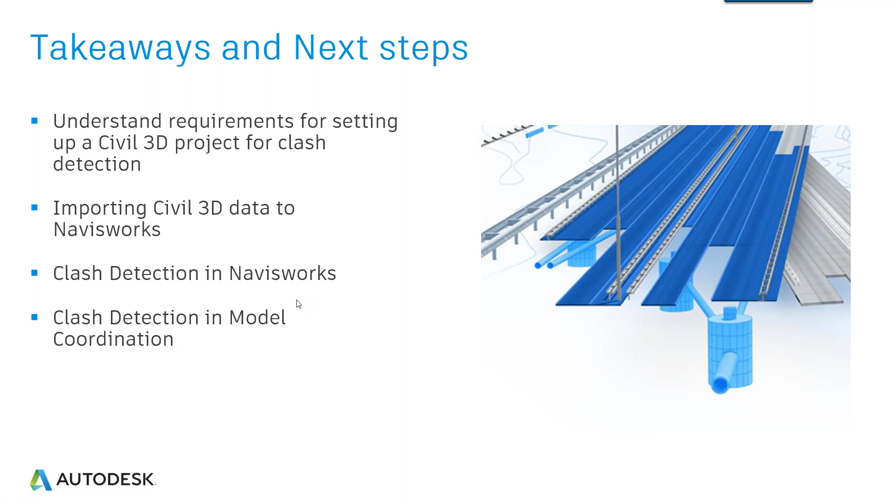Okay, so let's talk about what we're going to do, and you saw that this is not death by PowerPoint. Nope, not today. We're going to jump right into the product. So I know that everybody just can't get enough of these wonderful PowerPoint presentations, but just bear with me and we'll start playing around in the product here real soon.

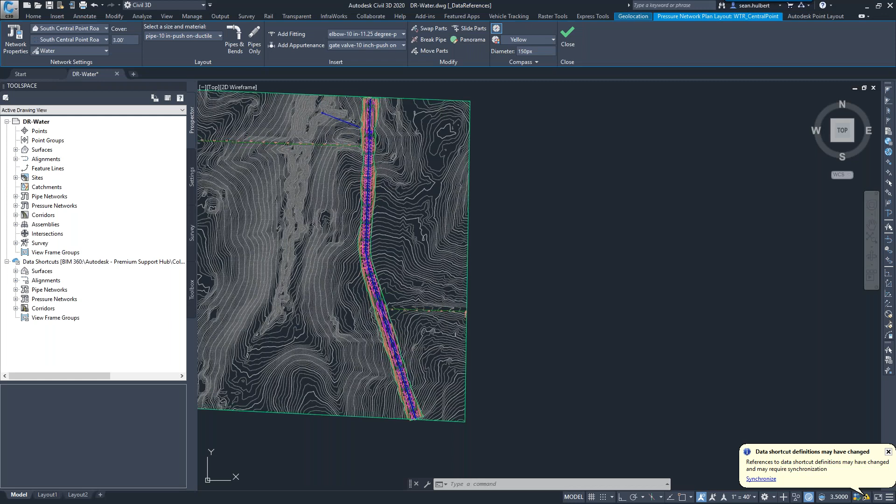So what does it look like to set up your files for clash detection? So what I'm going to do here is I'm going to go ahead and open up my Civil 3D drawing, and I'm going to shut everything down. I don't think I ran my rules on this pipe. This should be interesting. We'll see what happens.

Just to give you a little background of what I've done here, I kind of like to start with a blank slate. No tricks up my sleeve, not hiding anything from you. I just want you to know that what I've done here is I went out to InfraWorks, and this is one of the workflows that I love about InfraWorks. Just a little bit of one of my side tangents here that if you've attended my presentations, you know I take many of those tangents from time to time.

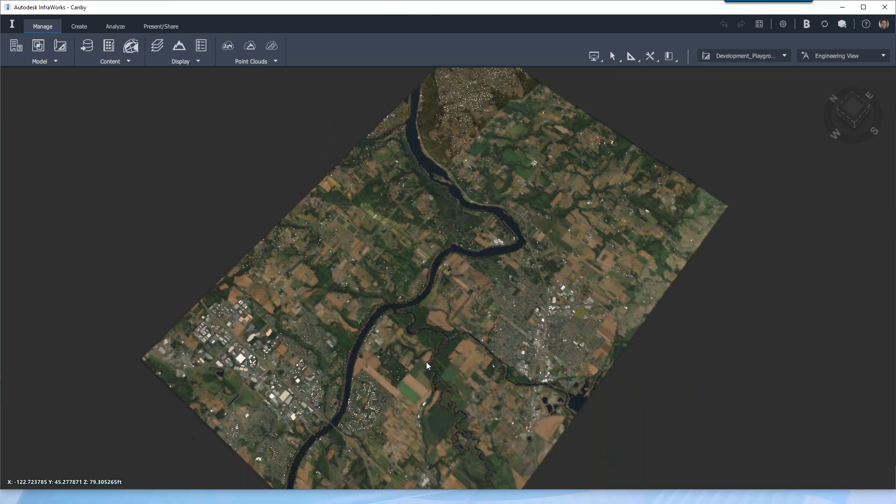But what you're going to see here is I've just jumped into InfraWorks. I'm going to say that 3 or 4 times today. I've jumped over here into a model in InfraWorks, and I just picked a nice flat area that I wanted to start doing my work in. So I needed a surface. I wanted some alignments. I wasn't going to create all this from scratch. Real quick and easy, I just grabbed myself a data set right here in my InfraWorks model, sent that over to Civil 3D, and started doing my work.

So I kind of like to just bring everything together and tie my story around, because one of the comments that I get from a lot of our customers is, why do we have to keep learning all these different tools? And the very first thing I'll say is, have you ever been on a construction site and looked at the tool belt that the people are carrying around? There's no less than 30 tools in there, I would guess, on any good day, anything from a pair of pliers, a measuring tape, a level, hammer, screwdriver, you name it. So think of your software the same way.

We don't have any trouble jumping out of PowerPoint, jumping into Excel, jumping into Word to get our word processing, our presentations, and our spreadsheets done, but we get a lot of reluctance to jump out of Civil 3D and jump into Navisworks to do some clash detection. And I just want to start understanding that apprehension a little bit better, but I also want to start helping our customers understand that we want you to use the right tool for the job.

There is not one piece of software made on the planet that will do everything that you want it to do. It doesn't matter who makes it, that software does not exist, because what you want your software to do is a little bit different than what I want my software to do. So we're trying to make everybody happy. And so that's why we really do have to creep out of our comfort zone sometimes and leverage the tools that we have available instead of just what we were told that we needed to be using. So with that little spiel, let's go ahead and jump over to Civil 3D.

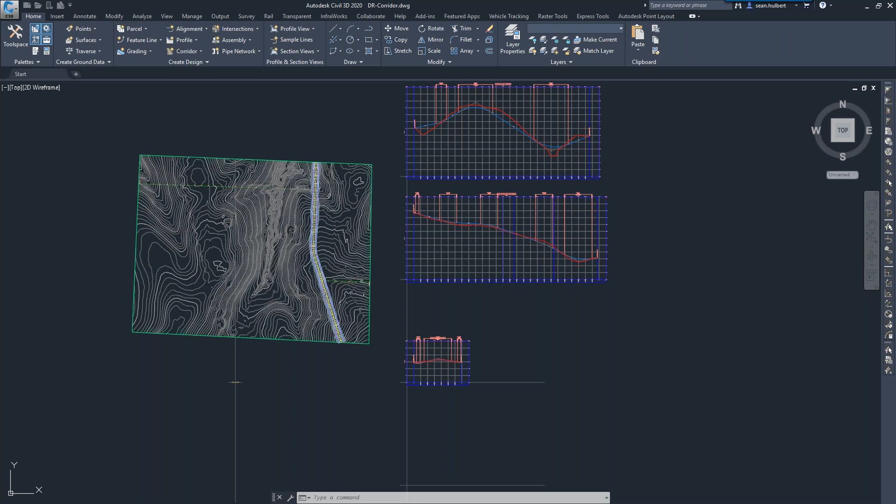So we're going to just jump into this corridor drawing that I created here. What I've done is I've separated all of my files in a traditional style environment. I do understand that you can push everything in the same file inside Civil 3D if you would like to. I recommend against that, because if you do get corruption, you've corrupted everything and you've lost everything.

But in the model coordination environment, you're really going to need to keep these objects separated from each other, because it's not going to want to clash on the information that's in the same file. It seems more user-friendly to keep things separated, and it seems like a more realistic environment, and that's what we're trying to go for here. Try to stay as close to reality as we can.

So what I've got here is just a quick corridor drawing. You'll see that I've created my data shortcuts over here in BIM 360, so I can leverage all that information. And because I knew you were going to see this, I wanted to let you know that that surface came from the InfraWorks model that I created.

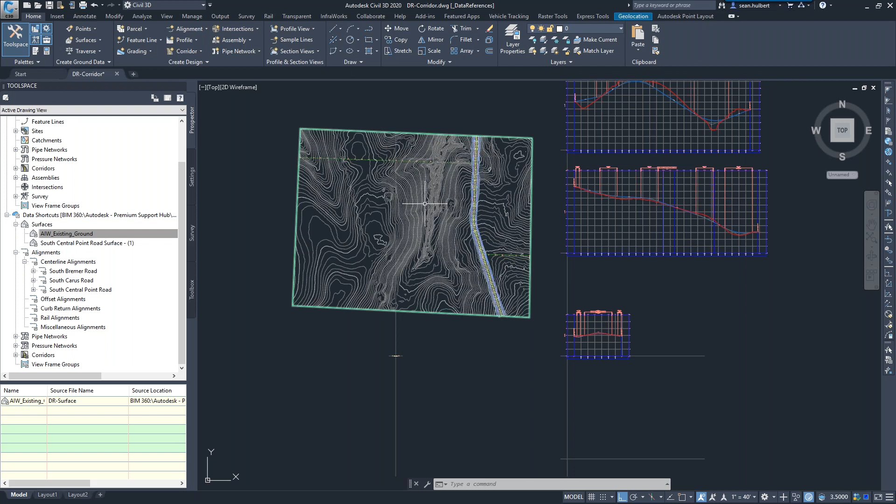Now, a couple quick things. This is just the component road that came from InfraWorks. I went ahead and updated some of the information that came out of InfraWorks. Actually, I wanted to make the road wider so I could get all my pipes in it. Kind of the advantage of creating stuff on the fly in a pretend world instead of the real world. I can just make the road wider, where not everybody on the call has that availability.

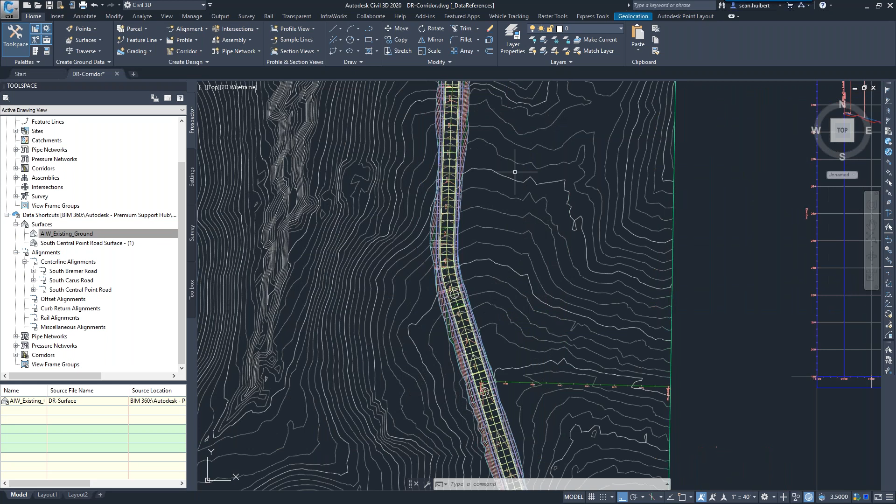And so what we've done here is we've created our corridor. And inside this corridor, one of the things that we're going to want to do is extract our solids. And the reason is if you think about the way that a corridor is constructed, corridor is based on the,

pardon me, here we go, a little bit of a tickle. No virus, I promise.

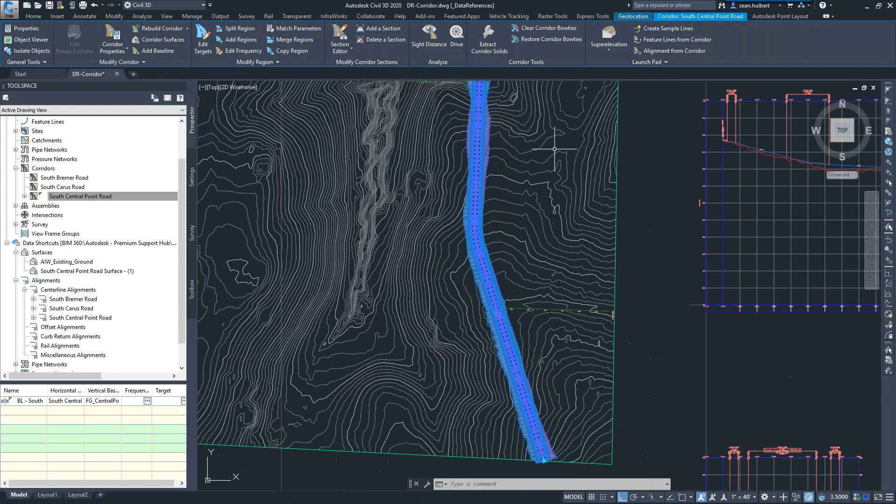So if we think about the way that corridor is constructed, we're basically creating that corridor based on the frequency inside the corridor properties. And so if we were to run a clash detection in something like Navis or in our model coordination tools, we're not going to have a complete object in every scenario, right? We're only getting those cross-sectional samplings. So one of the first things we want to do with our corridor is extract our solids.

And this tool's been around for probably a good 10 years now, maybe not quite that long, but it's been out there for some time. And what you're going to see here is, I've lost my dialog box. Let me try that one more time.

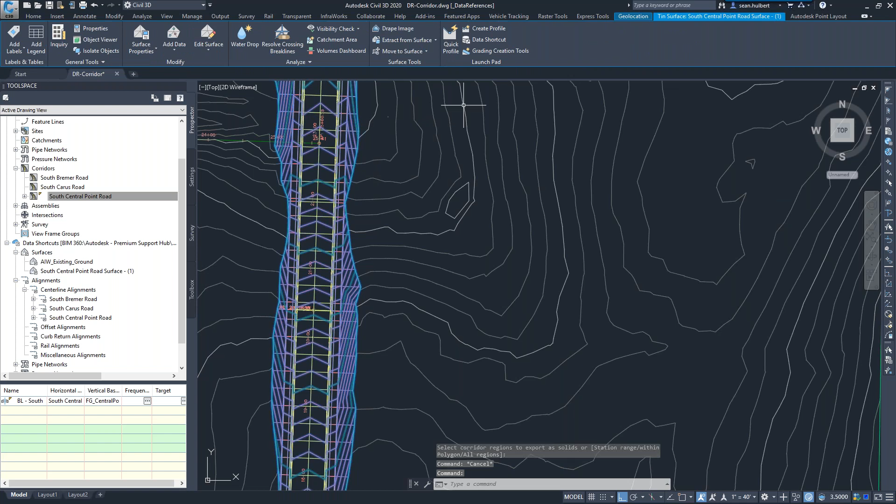That's my surface, not my corridor. And you'll see that I've already got my solids in here, just so you don't have to wait for me to do that. But what I was trying to do is show you the process to get those to extract. So we'll extract our solids. Down here at the bottom, it's asking, where do we want to extract these solids? Is it just within a specific area, or do we want to do all of it? There, I was not reading my command prompt. The very first thing we all learned in AutoCAD is to read that command prompt.

And now we're going to talk about preparing the information that we want to send out for clash. So you'll see in this assembly, we've got our lane, we've got our curb and gutter, we've got our sidewalk, we've got our daylights, and then we've got the other lane on the other side of the road. And here again is a great example of me not following my own CAD guidelines and using good naming conventions, because if I'm not paying attention, I'm not really sure where this object is at. And if this was a much more complicated subassembly, it could be even more challenging for me.

So just back on some of the things that you'll hear me harp about in all of our presentations is good naming conventions. And then all of the things that I harp about, you'll see that I'm very much a hypocrite about my own hypocrisy.

So let's continue here. We've selected all the objects that we want to extract. Some of these elements might not be useful, or do we really need to extract the daylight? And one of the things we'll talk about is when we're working with surfaces in Civil 3D, while they're extremely powerful, they're extremely ignorant, in my opinion, because they have no idea about the material that makes up that surface. They're just that collection of lines that are creating this object for us.

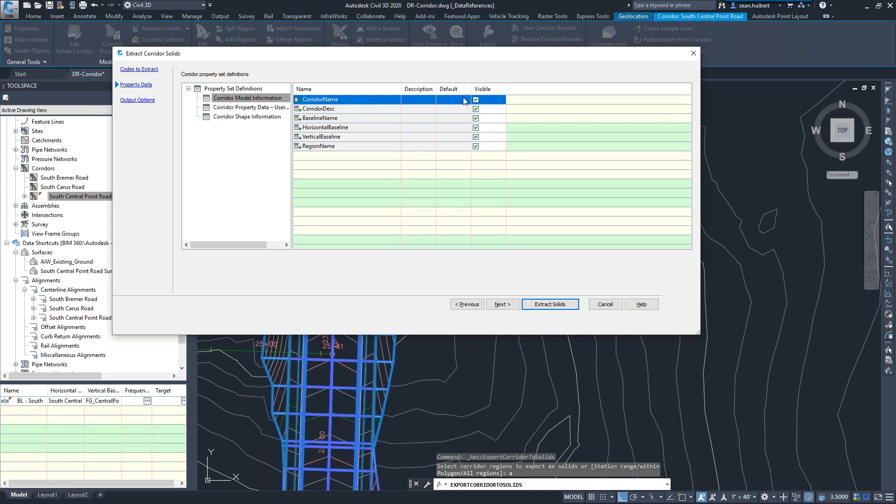So, it's definitely there. It's a tool that we can use, but you may consider not including it when you're doing your extractions. So let's go ahead and we'll pull off Daylight General on both sides. And that way we won't have to worry about anything that gets in our way. And then we'll say next. Now we've got some other settings that we can control in here. A lot of extra information. We don't need to go into all of this. Go to our output settings.

This is where I want to point out that we want to base on swept solids. We want that solid object between those frequencies. That way, we'll see a much better object in order to do our clashing. I'm actually going to send this into a new drawing, which will break our dynamic link. But since I've already got them in this drawing, I didn't want to send them back into here. So we'll go to our BIM 360 environment. We'll get into our collaboration for Civil 3D project. And these are going to actually be something that we're going to use for coordination.

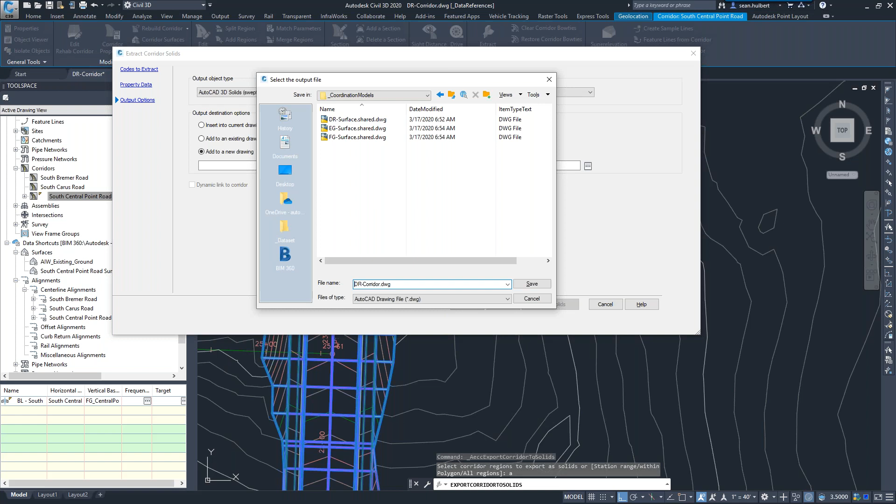So we'll just call them solids. And there we go. Extract our solids. It'll go ahead and create that drawing for us, and then we'll be able to leverage that information inside our Navisworks models. So this should be all fairly review for everybody.

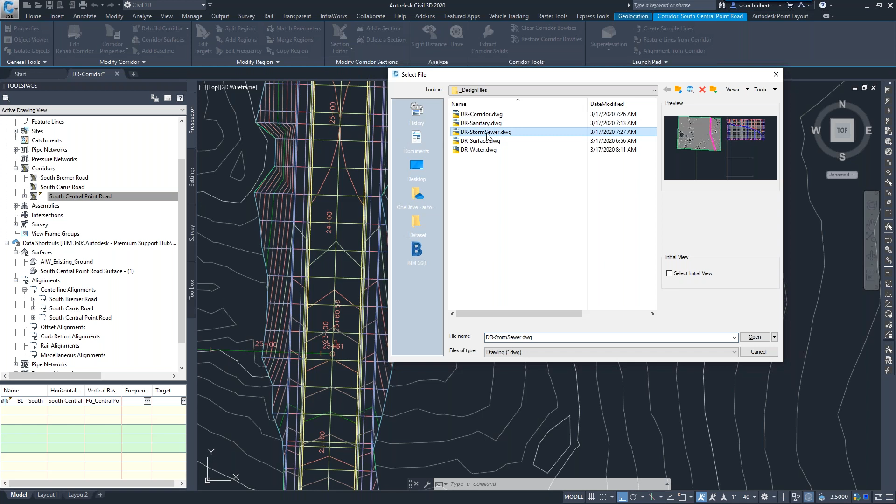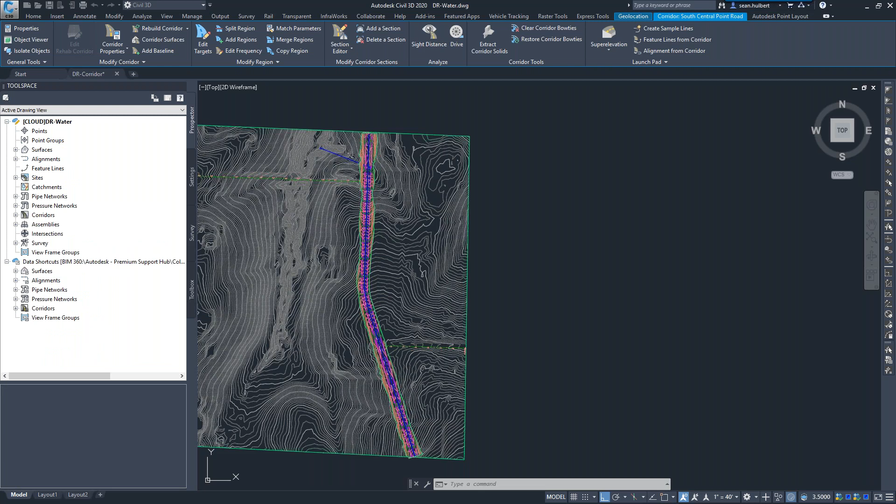Let's go ahead and open up this water drawing real quick. I just want to make sure that the changes I made to my drawing did get saved before I go and embarrass myself. You'll see that I have collaborated. I have referenced all of my different objects into my different drawings, and that's going to give me the ability to work as we normally would in our industry. We're going to be able to see that we've got our sanitary, we've got our storm, and we've got our water here. And I'm going to go ahead and select that water.

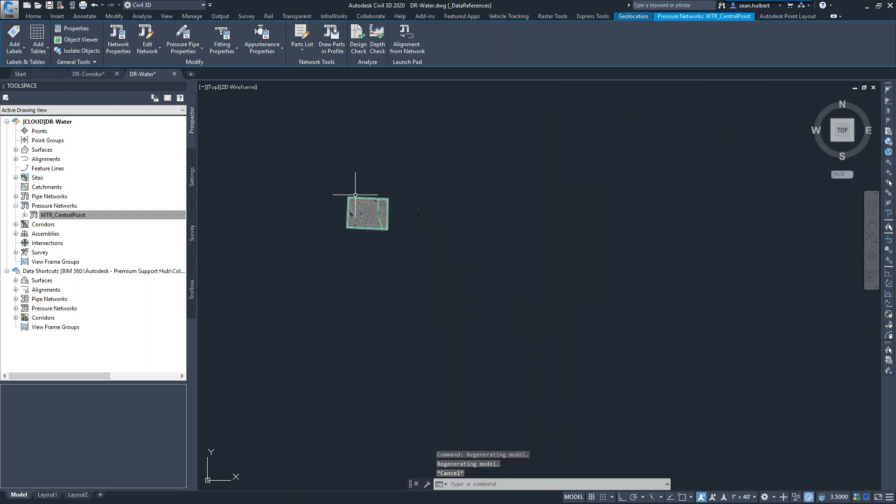And I'm going to draw this in profile. That's what I did not do. I did not set the vertical on this. My apologies. Give me just 30 seconds here. Surface profile off of both of those. Oops, and that was the wrong street.

Again, Sean's not paying attention, reading his prompts. We've all been talked to about that before, I'm sure.

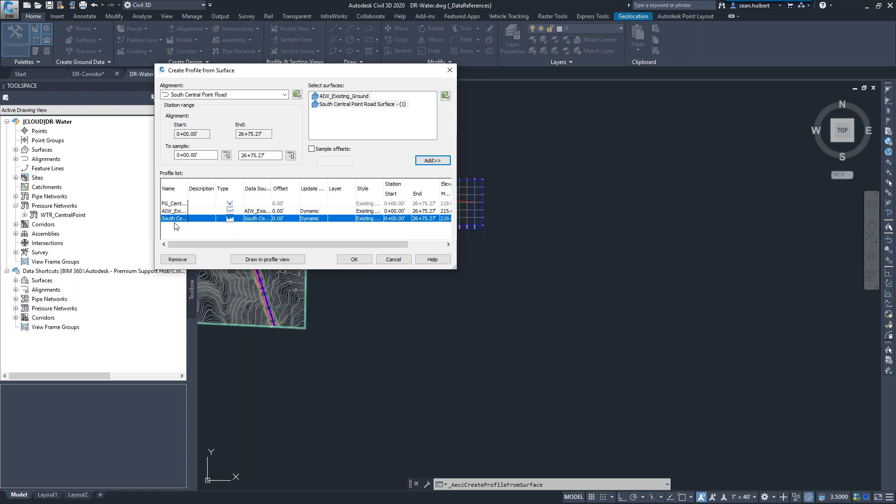Getting in a little bit of a hurry. My apologies. There we go. We'll get rid of that. So we've got that. There we go. Create our profile view. We're going to get rid of this one. We don't need that road. I didn't set my design profile correctly. Let's go ahead and correct that real quick.

Things are running just a hair bit slow for me right now because I'm trying to be in a hurry. That's the way it always works, right?

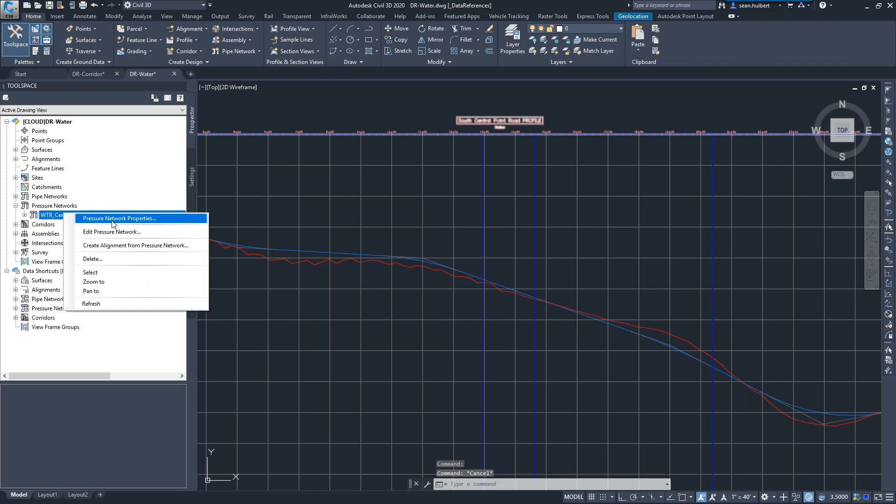There we go. And now I'm going to go ahead and draw my pipe in my profile. I knew I'd forgotten to do that. My apologies, like I say. Yeah, let's just go ahead and drag this guy up. It is vertical. We're not too far off. Yeah, we are. You can see us coming out of the ground right here. So that's actually not going to work for us.

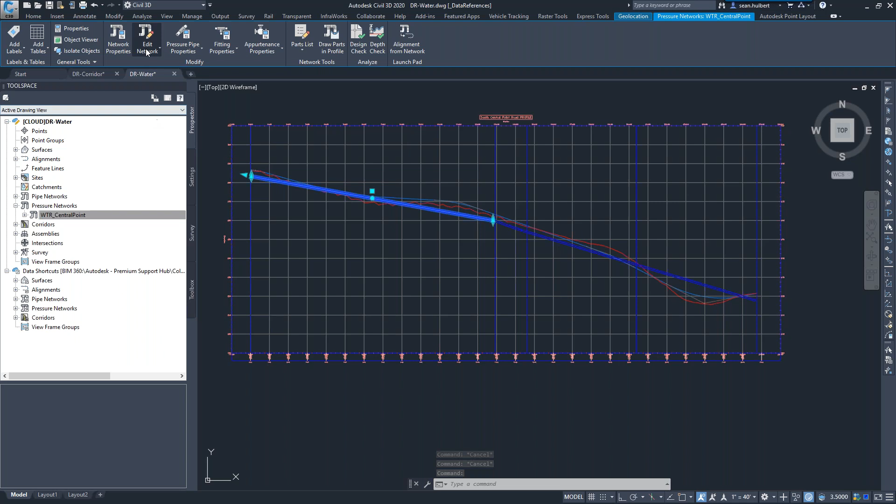And let's make sure that it's going to hit something. So I'm going to put that at about 4 feet. I'm pretty sure that's going to hit. Oh, should have grabbed the whole pipe. Sorry. There we go. Okay, we'll leave that one where it's at. Everything is underground now. Let's go ahead and save our drawings.

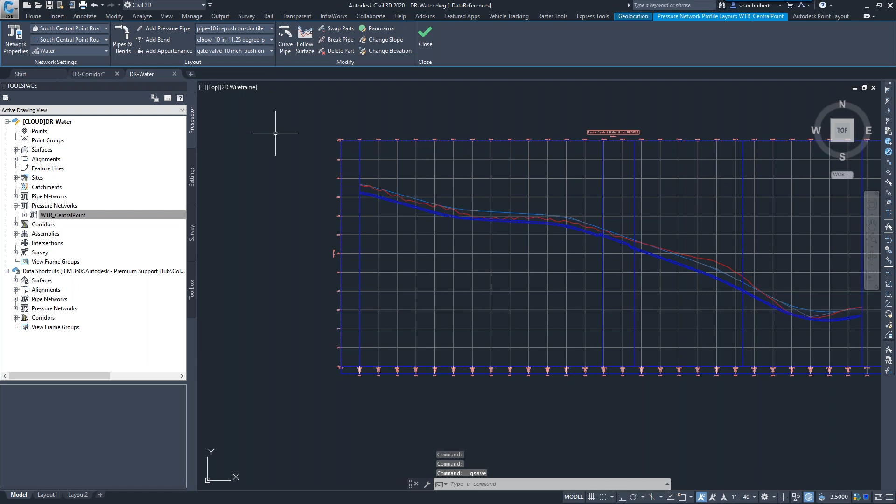Let's talk about getting this information moved over to Navisworks. So again, you heard me talk about how surfaces behave. Let's go ahead and start a new Navisworks file here. Okie doke. So we're going to go ahead and append it. And because I don't actually have the model stored out here in BIM 360, we're just going to go ahead and append a local model right at this time.

And what we're going to start with here is my corridor, because I know I have the solids in that corridor previously. And I'm going to go ahead and add sanitary, storm and water. I'm going to leave my surface out because, like I said, I don't really need to clash with my surface. And so the first thing you're going to see me do here as I start preparing my drawings is start hiding all those surfaces that are in my way, and then we'll start running some clash detections.

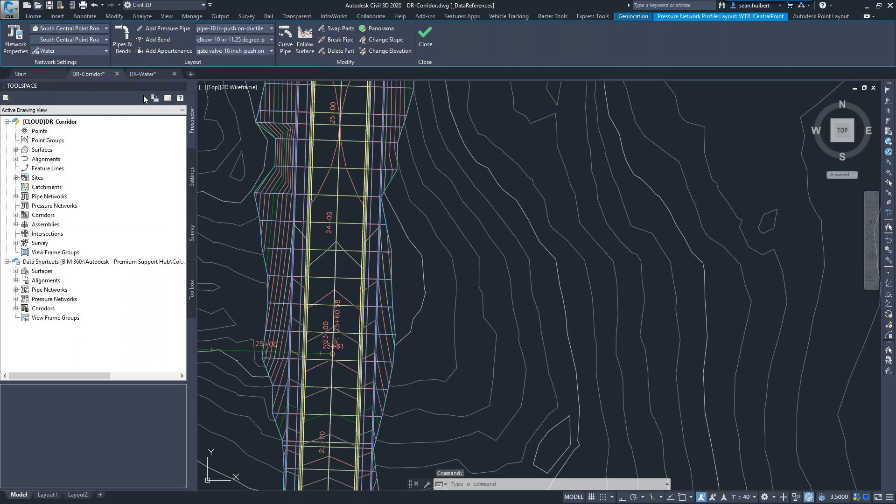Now, while this is happening in the background here, I'm going to jump back over to Civil 3D just to give you a more complete look at what we were working on here. Oops. Sure, so let's go ahead and I'll open my storm file here as well. And you can see that we've got our pipe network designed. So we're messing with a corridor today. We're going to play with some pressure pipes, and we're going to play with our gravity pipes.

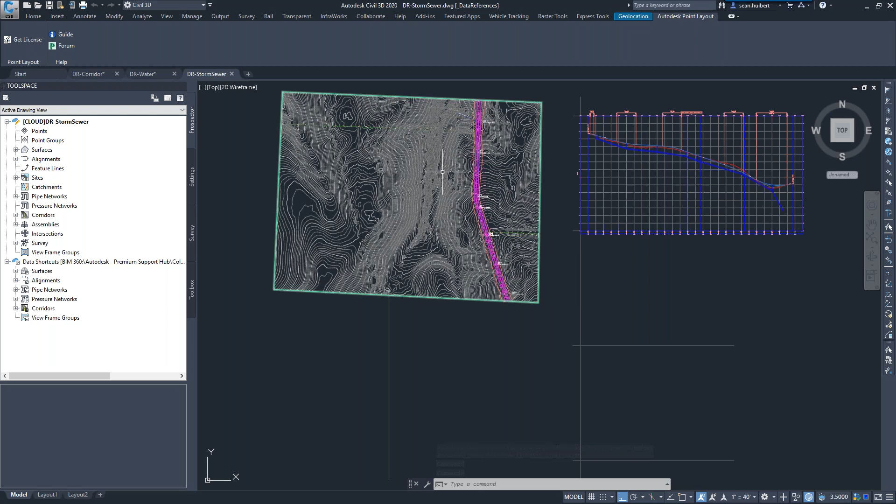So it's pretty much everything that you're going to need in any Civil 3D project as far as what we want to start clashing inside Navisworks, or finding those potential conflicts. So here you can see our storm line. I haven't brought my water or my sanitary over. Not important, but it is important to understand that this information will come through in unintended areas. So we just have to be mindful of it. So we've pretty much prepared our drawings the way we'd like to see them.

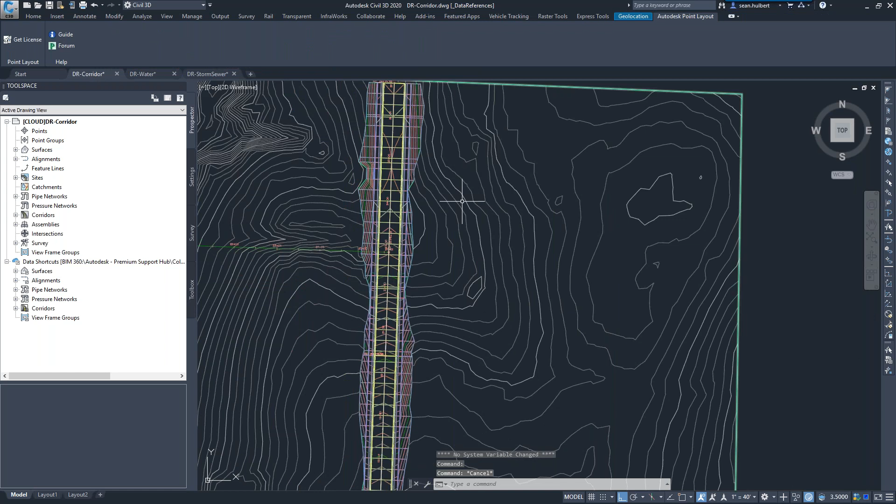We were killing a little time waiting for Navis to do its thing. Didn't kill quite enough time.

So let me just throw out a quick question there for everybody, and you can just throw your answer up in the Q&A. Is it safe to assume that pretty much everybody is working from home at this point?

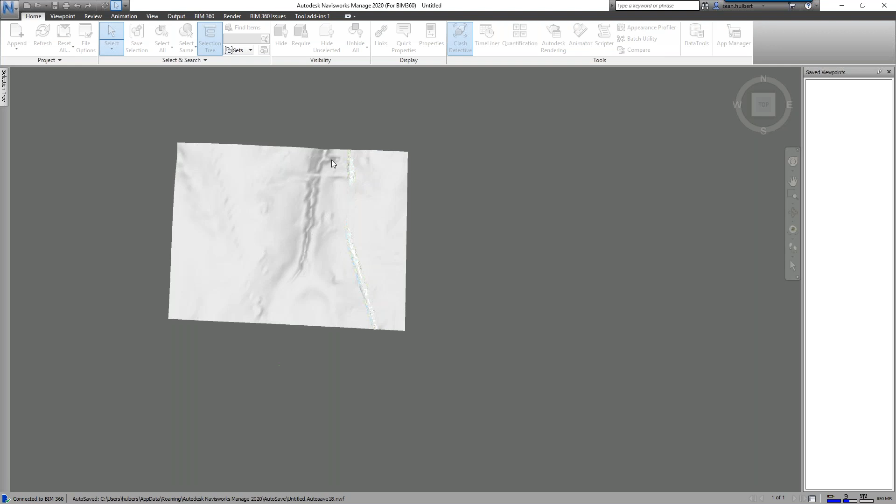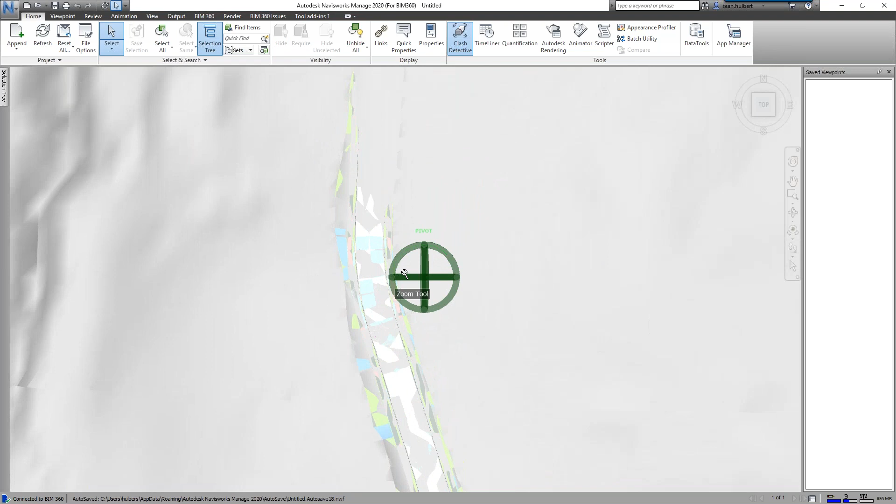Wow, that's a long break. Well, they're doing virtual online. My concern is, is she going to get her room and board back? Because that's not cheap at college. Right. And do I get that money?

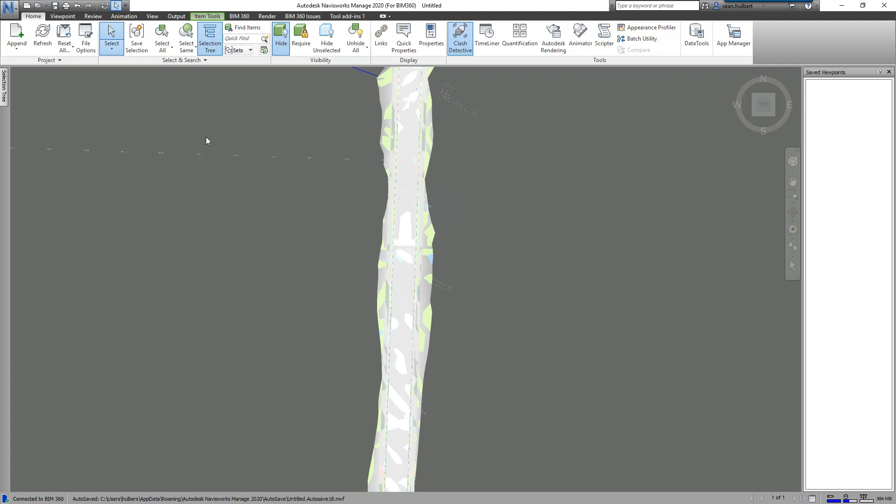Okay, so what you're seeing me do here is I've brought in my drawings, and you're going to say, yeah, but you didn't bring the surfaces in. Well, remember that I have those surfaces data referenced into my Civil 3D files, so I'm seeing them again here. And that's something you definitely want to be paying attention to, because when you start doing your clashing, you want to make sure that you're clashing the information in the file that you intend to be clashing it in, and not in some other file just because it loaded mistakenly.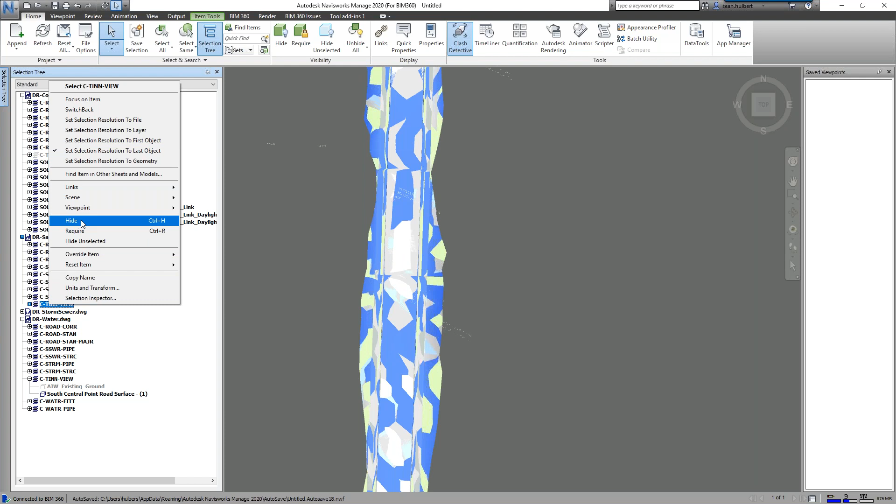I'm also going to go ahead and hide the TIN for my road, because I know that when I built my model, I had set all of my information to that surface. So I know that it's going to be pulling all of my vertical data off of the surface. I don't have to worry about it here in Navis. I'm not going to do those clashes inside my model.

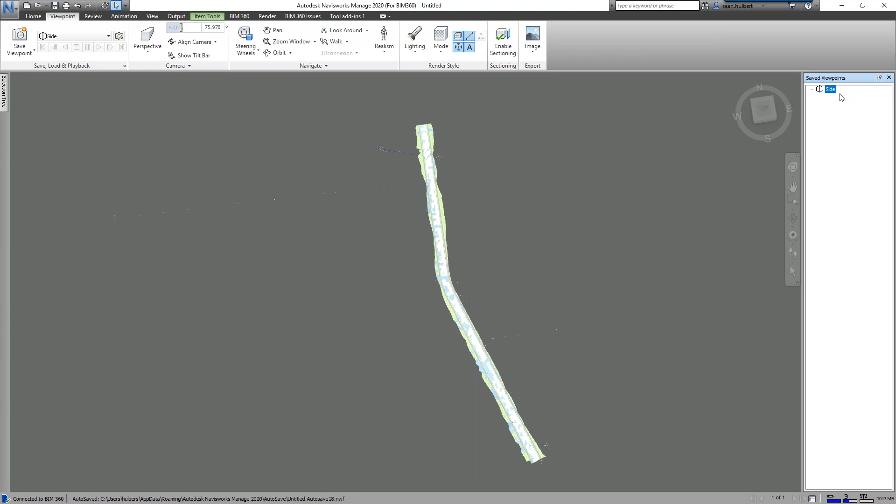But as you can see here, now let me just take two steps back. One of the very first things I like to do is save a viewpoint. Because if you're working in real world coordinates in Navis, sometimes it can be, oh, that's not site, that's side. Talking and typing at the same time is never a skill of mine.

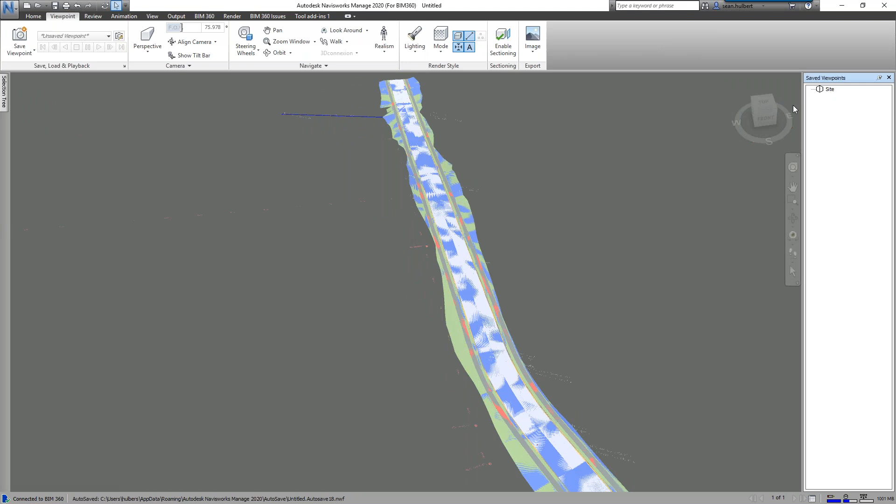When you're working in Navis, from time to time in real world coordinates, you can have things happen where you lose your model. And all I did was do a little zooming, and now you can see that I'm pretty much lost in space. Can't find myself. Oh, it did pop back up. But as I'm zooming around, it's just not happy. I always like to save my site, and that way I can get back to where I'm at. Also, when you're doing your clash detections, this is going to help you move around your model as well. And I also like to turn off ortho.

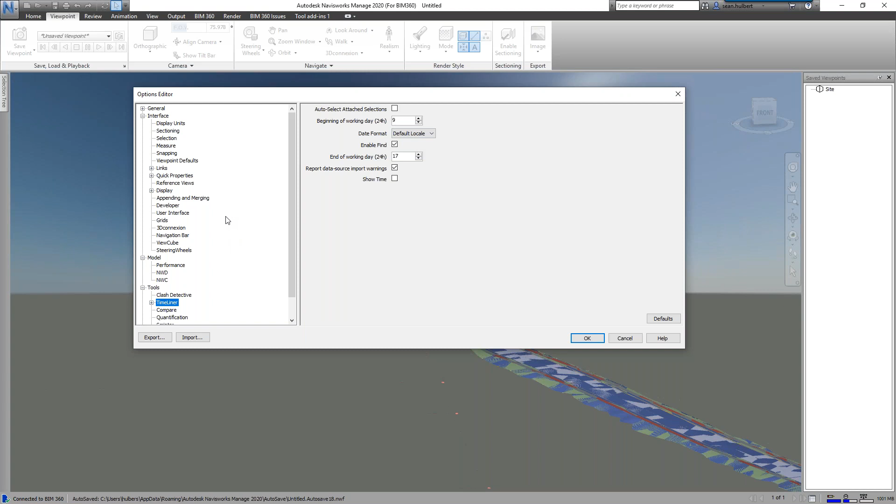Now, one of the things that I failed to do is go into my options and talk to you about some options. Do make sure that you set up your units correctly when you're jumping over to Navis. And if you want to limit any of your coordinate accuracy, you can do that as well. We don't need anything more than a thousandth in Navisworks when we're doing clash detection. There's really no reason to go any further than that. Go back to perspective. There we go. Oop, and see, you saw me lose it again.

Okay. So as you can see here, we've got our objects brought over. We've got some text and things as well. We can tell that not to come over if we don't want it to. Again, that's underneath in our options here. We have a lot of control, not full control, but a lot of control over what elements are being brought over from your DWG or DXF files. You can see I turned views, points, and lines off. I didn't really feel that we needed those because the lines aren't necessarily going to be clashing because they're not in 3D, or the ones that I'm using.

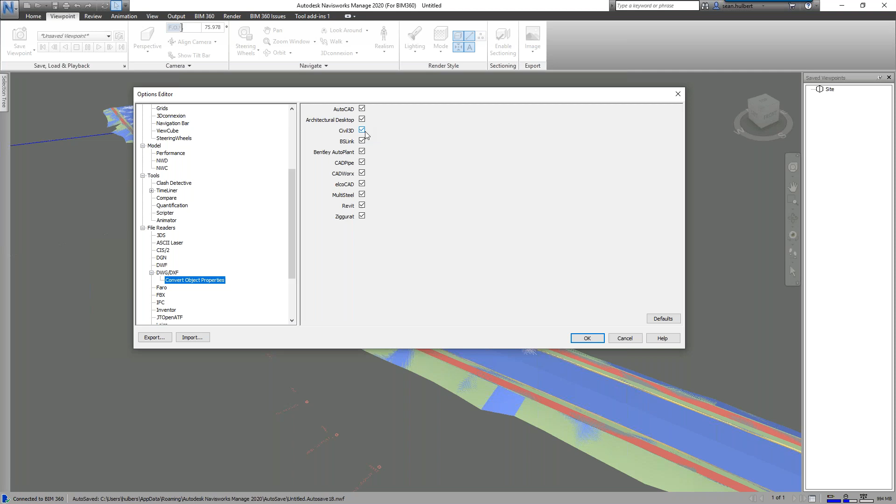The other thing is that right here, this has become a challenge for some users from time to time, because this dialog box will get unchecked for some reason, and the objects that you're trying to clash in Civil 3D are not coming over. Your pipes and your other elements are not coming through. This is likely the reason that that's not happening.

Okay, so without further ado, we'll go over here to Home. I've got my Clash Detective panel open. I'm going to go ahead and just drop it here right on top, and you can see that I can dock this using my docking tools here. Typical Navisworks functionality. That wasn't going to come out very clean, was it?

So the very first thing we're going to want to do is we have to add a test. Now, what do we want to test on? We have a lot of information that we can go in here. Let's go storm and sanitary. I can spell.

And now what I want to do is come over here to my sanitary drawing, and I want to choose my storm drawing. But do I want to choose the whole thing? No, I don't, because we know that there could be some corridor elements still in there since we have that corridor data referenced.

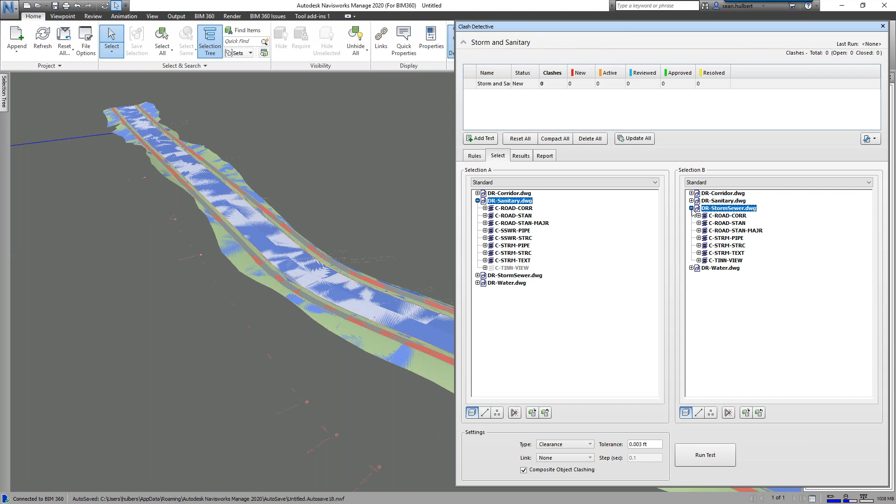So again, the best thing for us to do initially is clean a lot of this information up using our hide functionality. I'm going to go ahead and hide my corridor here. The reason I'm hiding my corridor is, you see, I've got my solids. I'm not going to clash on my corridor, I'm going to clash on these solids that we extracted.

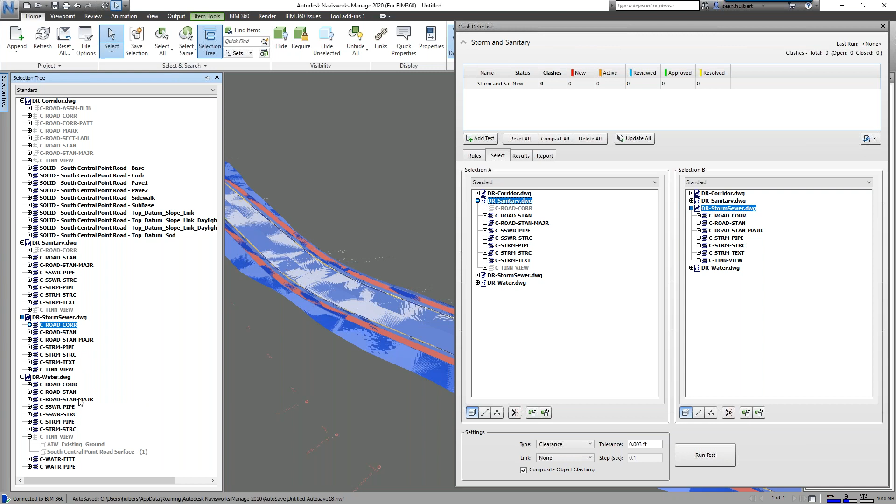In our presentation portion, or the Civil 3D portion, you saw me actually create a separate file with those elements. I can bring that in and we can clash on those. For right now, we're going to go ahead and do this because I know this one is functioning the way it should. You know me, I'll get a little bit renegade, and then things won't function the way they should.

So let's go ahead. We've got our clearances set up. Do we want a hard clearance? Do we want to be a conservative hard, which gives us a little bit of a buffer there? So we have our determinations.

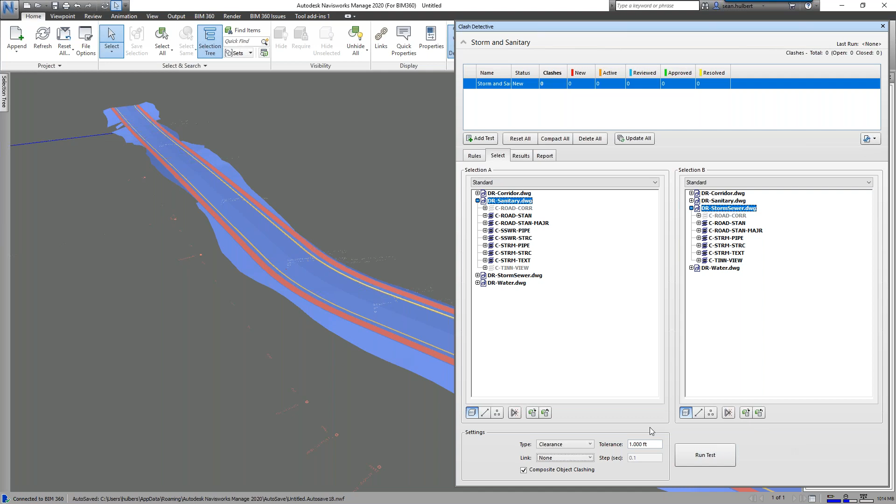And then where do we want to link this back to? We're not going to link this to our timeliner, we're not worried about that. And let's go for clearance. Since we're doing sanitary and storm, we're going to need a good foot of tolerance through these things. So let's go ahead and run our test and find out which clashes we get.

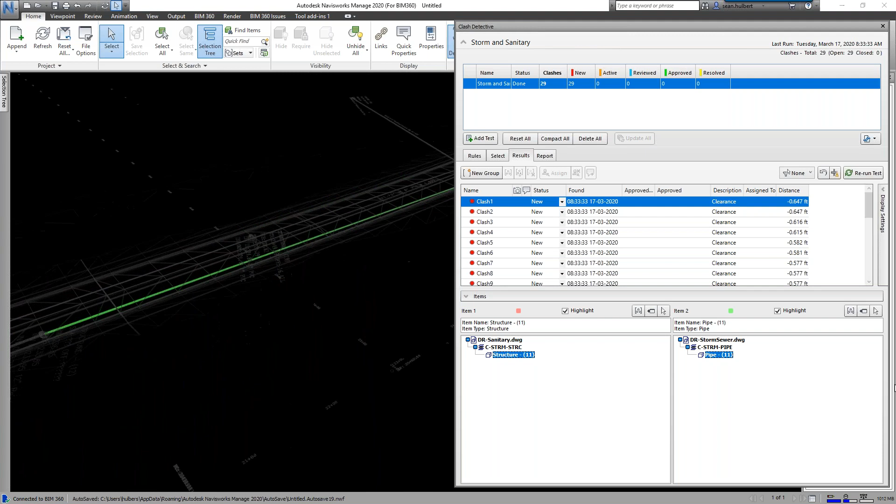Here we go. Now, Sean has made a mistake. Obviously, structures are going to clash with pipes if they're connected to the same thing. This one is not necessarily showing us a clash that we should be worried about. This is clashing a pipe with a structure, and the storm structure is coming from the sanitary drawing because it was data referenced in.

So again, this is just part of prepping your file for use. I failed to do this when I was doing my updates. Another way to do this would be to have files that we pull outside of our design to do our clashing. But then think about the extra step that's required there. So there's not a perfect scenario for anything in any software, but there are a lot of great recommendations that will follow.

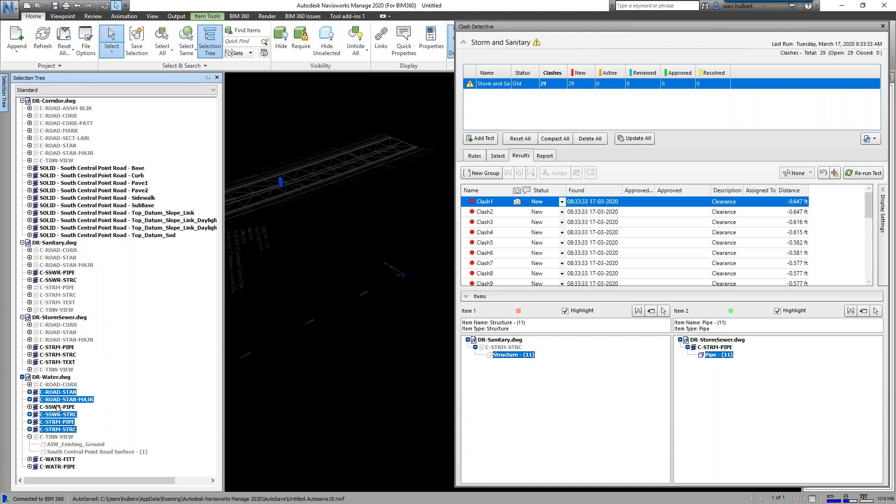So what you're seeing here is I've turned my storm off in my sanitary. I'm going to come up here and turn all my road stuff off as well. I'm going to turn sanitary and storm off in my water. We don't need to see our text.

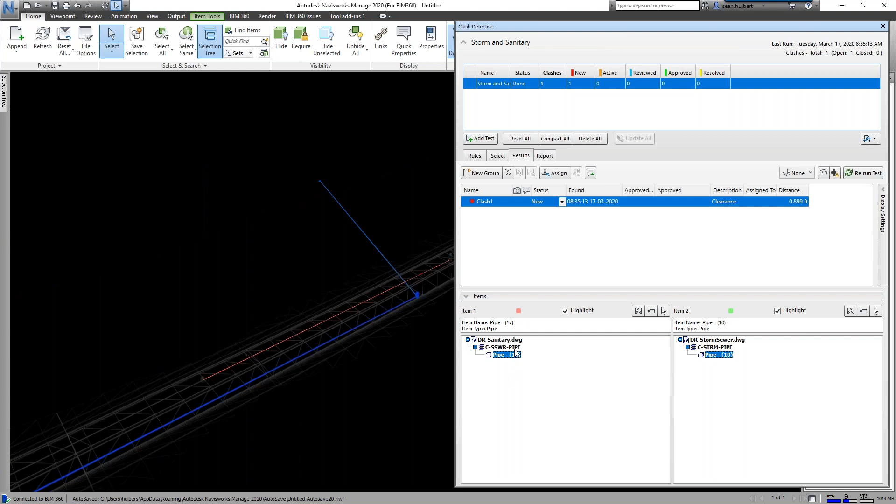Now what we should see is we have different clashes. We actually, right here, and this is kind of what we were hoping to see, is we have our storm a little too close to our sanitary. And there's a lot of time spent and wasted in civil design doing these exact activities.

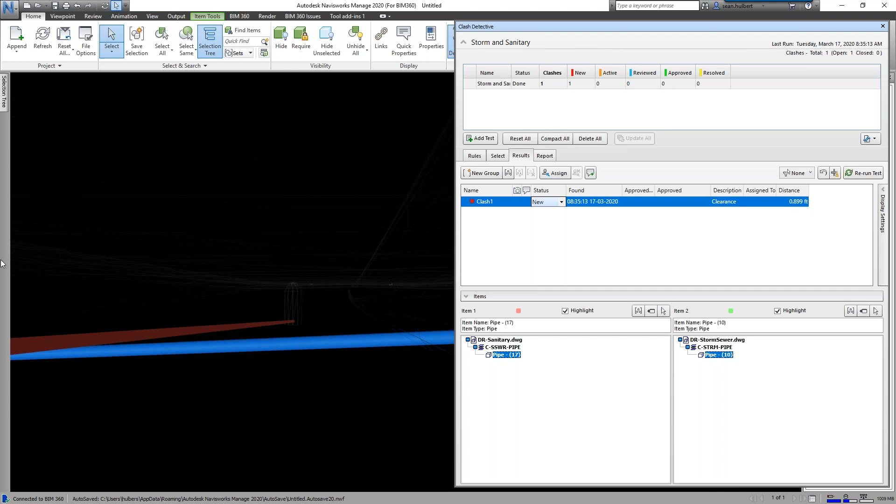You can see I don't have my catch basins attached to my storm system yet, but as those catch basins are added to my system, you're going to see more problems start arising. Right here, we have a distance issue. We don't have the clearance that we're looking for. We're pretty close, but we don't have that clearance.

And so now we can start creating our reports. We can extract that information. We can assign these issues or situations to specific users to have those issues corrected. We can group these issues with other issues related to similar problems, or we can create another test. Let's go ahead and run water.

Now, we could select our elements like this and not have to hide the elements. So again, just like most processes inside any Autodesk products, there's more than one way to do the same thing. We just ran a test and we have no clashes with our water. Let's look at what that test is all about.

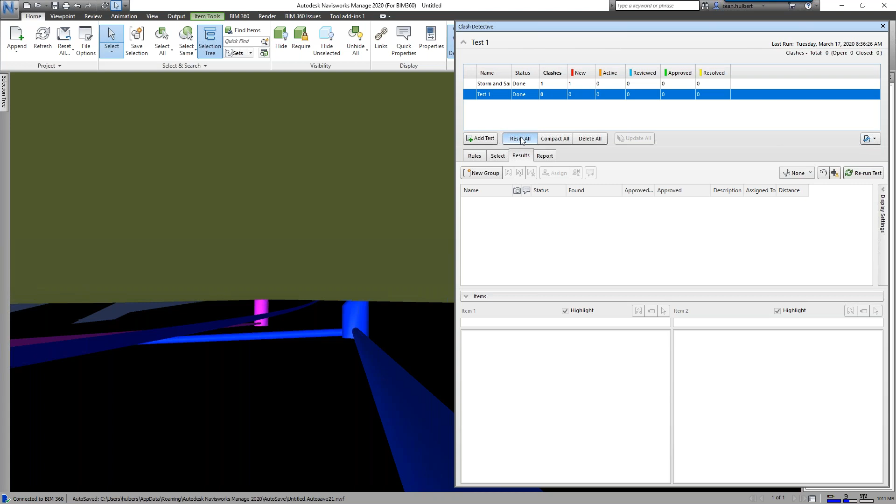Let me get rid of this one. Let's add a new test for water pipes and fittings. They should be hitting something - let me go ahead and do that to storm. I'm pretty sure they hit storm. We want a clearance of 1 foot. They didn't hit, they didn't hit, they didn't hit. So what we can see here is we've got our water line right here under the road.

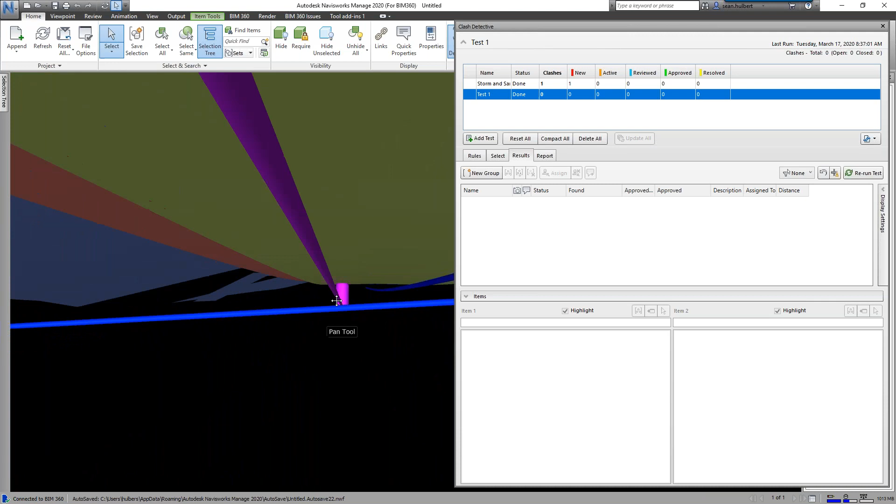It looks like it's pretty much got clearance everywhere that it needs clearance. Again, if I had my catch basins in there, you'd probably see them crunching into each other. But let's talk about our corridor now - let's see what information we can get out of that corridor.

This is where I think a lot of power is, because we can actually do these clash detections on each of the individual elements of the assembly that's built inside our corridor. For example, a lot of the times if our subbase has pipe up in it, that pipe has to have additional strength, or we have to move that pipe out of there. So let's go ahead and clash with all 3 of our piping networks, and let's see where the subbase hits a pipe or a structure.

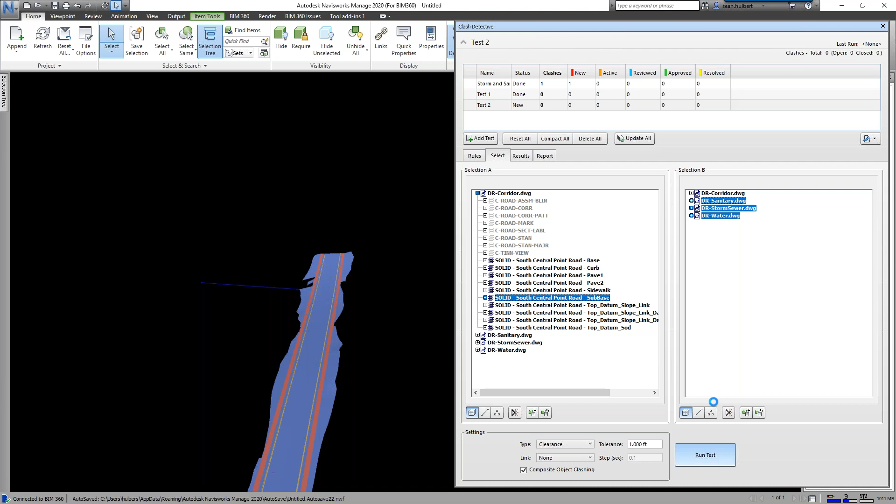Remember, our structures are poking through the subbase, so we had better see some clashes here. Exactly as I expected, we've got a clash here because it's poking through the subbase. Well, that's intended, we're not going to worry about that one. We can just go up here and say that this one is approved - no reason, nothing else to do here. We've looked at this, we know why it's poking through. There's no harm, no foul in this scenario.

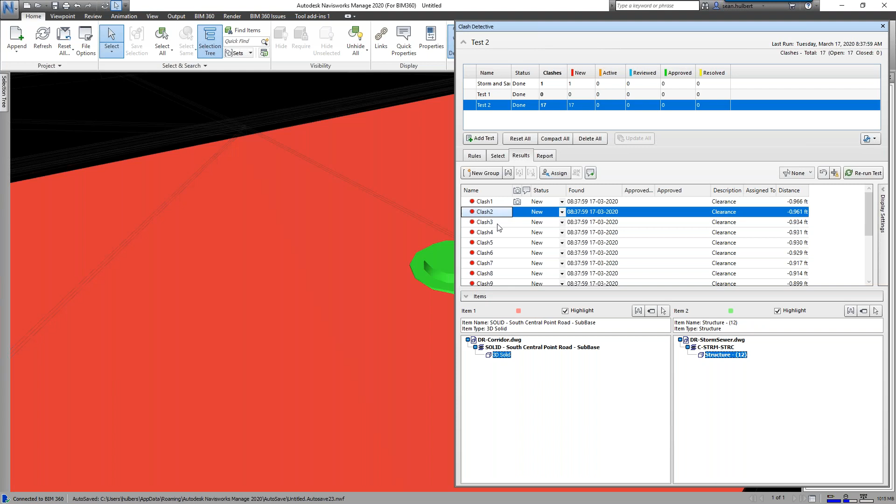We can continue through each of our different clashes, and you'll see that I bounce around. As I move through my clashes, each of the different structures are highlighted. Now what are we clashing here? This one looks like we're clashing with pipe, and that's what I wanted to see.

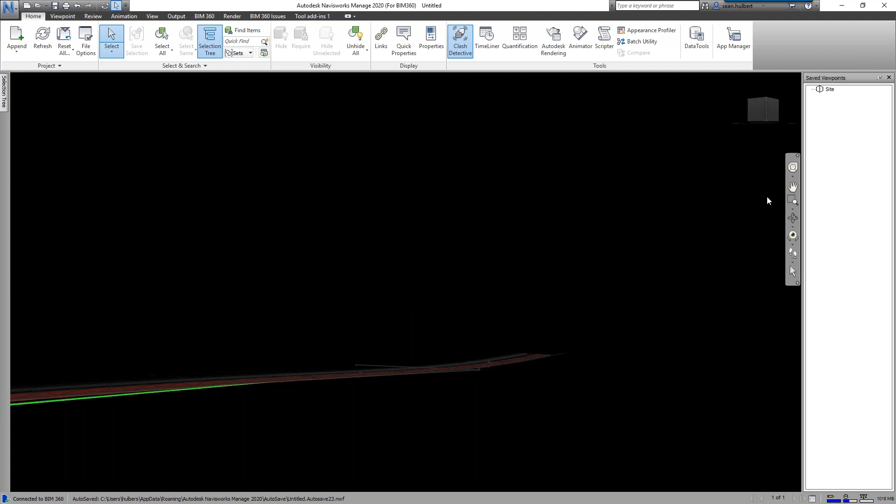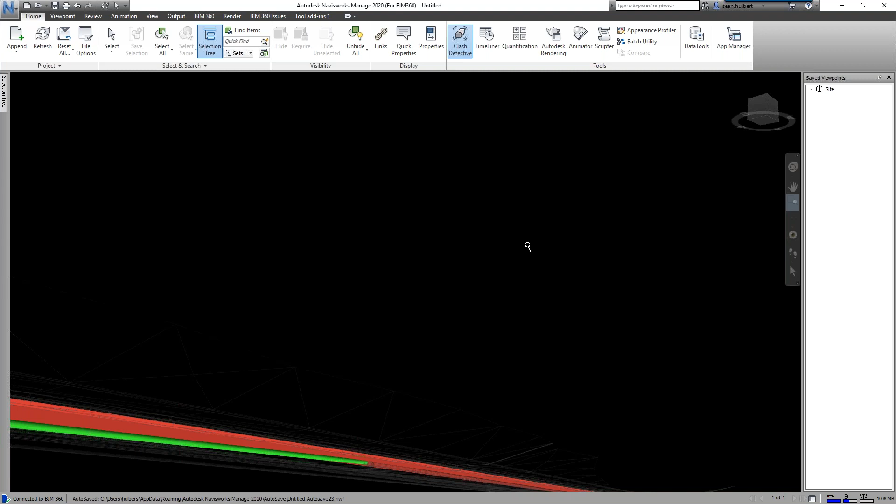So here's our pipe, let's go ahead and use some better tools. I'm going to slide this out of the way real quick. There we go - now our pipe is up inside our subbase, and that's definitely a challenge in civil engineering design. We can either make that pipe a little bit stronger, allow it to continue in that subbase, or we can change our vertical design for our storm system and get that into a more realistic location in our model. So that's kind of your high level information on what we're going to do here with Navis.

I hope you see the value of this. I've spent a ton of time in my career hand calculating every single crossing just to make sure we weren't hitting, or so we could show it on the plans. We now have the tools to help you show that on the plans, but we're going to show that on a 2-dimensional profile. What value is that 2-dimensional profile of the center line of this road if this pipe is not running down the center line or not even parallel to the center line?

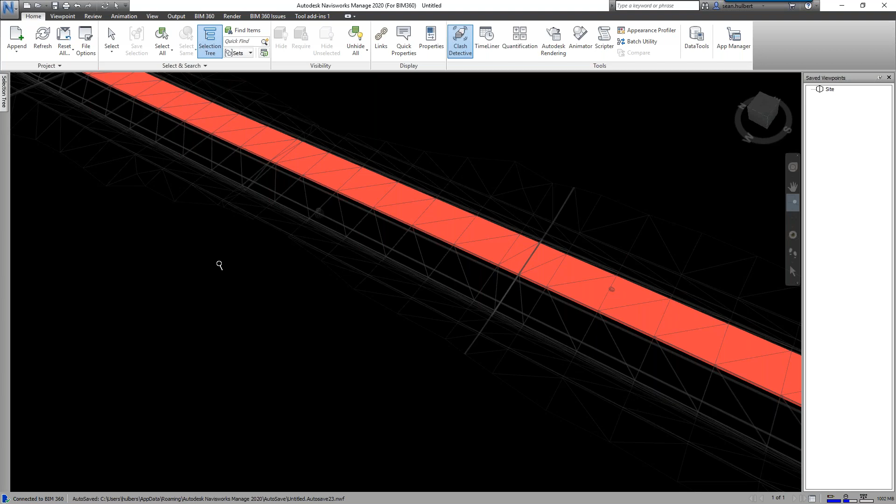So this is going to give you the ability to start doing some of those, and I'll say it, monotonous checks that will cost us a lot of time and money once it hits the field. I've heard a number, and I haven't validated it myself, but I've heard that a change in the office during design costs $24. A change during review after the plans have been prepared, or after they have been bid, is $240. Once that change hits the field, it's $2,400. So we see a factor of 10 every time we make those changes.

So if we could stop any clashes with known objects - and you're going to hear me say that one loud, known objects - then we have the ability to prevent a lot of loss in time, and well, time which is money.

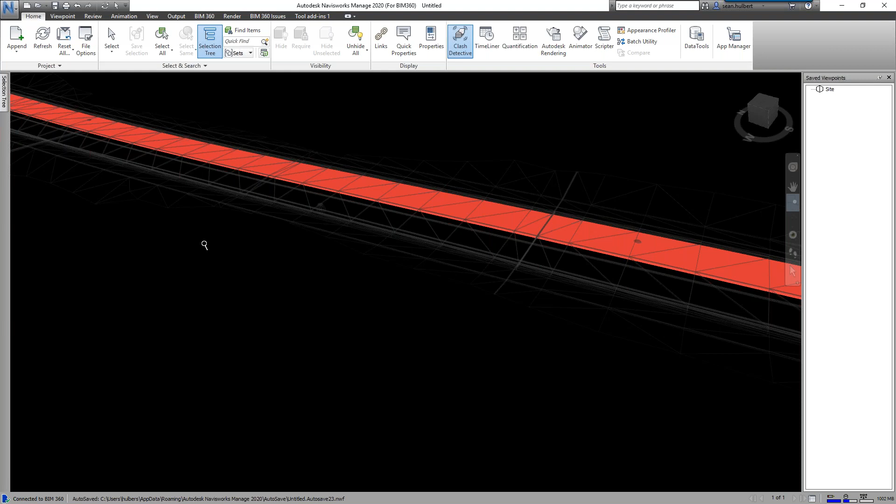The other challenge in this roadway we're working on is that I'm not showing you existing utilities intentionally, because in this scenario I have no idea where they are - I just picked an area in InfraWorks I was familiar with. But the point is, when you get your utilities located, they'll be located at a level of detail or quality of location. We'll do our best checks, guess and check. But if we can get surveyors or base map builders to create those objects in 3D, we can start leveraging the tools here inside Navis.

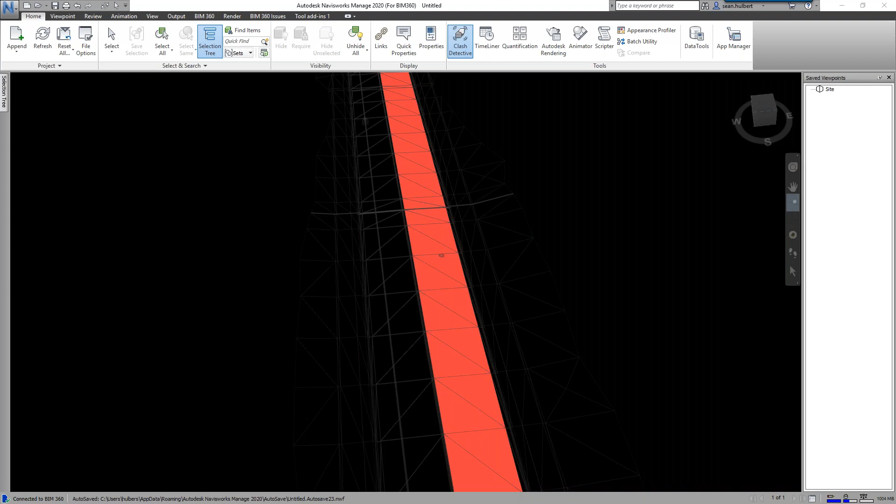Let's jump back over into BIM 360 real quick, and take a peek at what that looks like as far as doing any of our clashing.

Go ahead and sign into our environment. Everybody close your eyes because I can't type if you're watching. Any questions so far? It's a quiet group this morning. Yes, no questions - they're all sleeping at home. I don't think they're working from home. Hopefully nobody's managers are on the call.

What you'll see here is, again, that same collaboration for civil environment we've been playing with for weeks, months now, ever since we got that tool. One tidbit I want to share: towards the last week of February, we released a 2020.3 update for Civil 3D, as well as a 12.5.0.999 update for Desktop Connector. Please make sure you've loaded those - it will make your experience inside Civil 3D and BIM 360 much better.

Any challenges or recommendations you have, the best place to give that feedback would probably be the Infrastructure Futures portal. There's a lot of activity happening in there, and it is definitely a great resource.

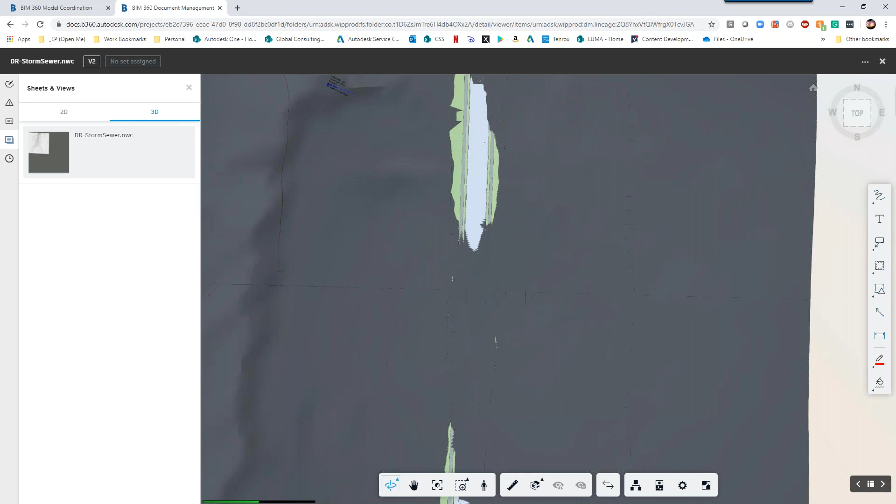We're going to go ahead and jump right into that NWC file, and we can move around in here just like we'd expect with any model inside BIM 360. And then, just like always, I lose things in space - there we go. Because Civil 3D moves a little different than Navis, moves a little different than Revit, moves a little different than InfraWorks - keeps us on our toes. So this is just giving you the ability to see that NWC file of the DWG inside BIM 360, just to let you know you can do it.

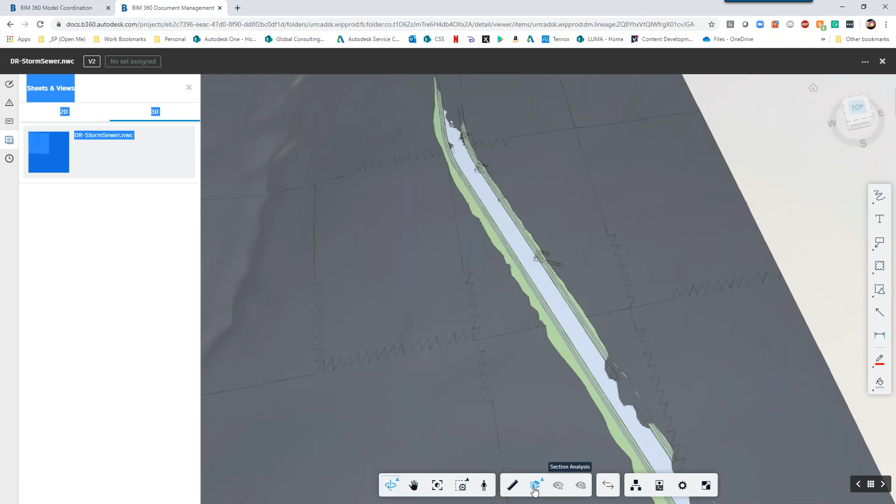You can run the compare tools, you can do your sectioning tools, just like we would in any BIM 360 docs environment. These I actually like - these are kind of fun, if I could figure out how to use them.

Okay, let's jump back over into our drawings. Now, one of the things you may have noticed is that I went ahead and created a surface inside Revit using my collaboration tools inside Civil 3D to send that surface out to Revit. We've talked about that previously, I believe.

Just as a quick recap here, while Revit's opening: I went to our output and published my surface to BIM 360. That way, when I have my Revit model, if there's anything in Revit I'm working with - and no, Revit's not just for buildings, right? It doesn't just do buildings. Very soon, to a Revit near you, under that safe harbor statement, we'll be able to leverage alignments inside Revit as well as the surfaces. So think about how that might work with a linear object being built inside Revit.

So one of our structures - and when I say structures, everybody thinks of bridges. Well, bridges are definitely an iconic structure that can be built in Revit. What about a retaining wall? We can do our retaining wall design inside Revit. We can leverage the generic Inventor objects that we bring into InfraWorks, which we then send over to Civil 3D and into Revit.

So you can see me bringing that holistic toolbox back conversation, right? We're using Revit, InfraWorks, Navisworks, Civil 3D, Inventor. What else? BIM 360. I mean, we're gonna have the whole suite of Autodesk products up on the screen here in just a few minutes. Aside from Alias, I don't think I know how to use that.

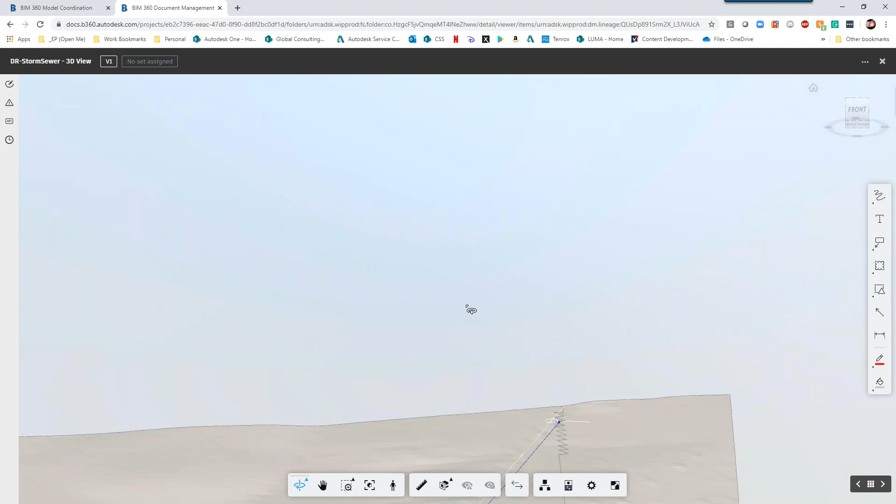Anyways, let's jump back over into our model and let's jump over into our model coordination. So what you'll see here that I've done is I've uploaded my drawings into my plans folder, and I allowed the BIM 360 environment to process this data. As you'll see, I'm going to jump over into my drawing, just like you would expect. If I get underneath it, here's my pipes that are in that drawing.

And so now what we're going to do is we're going to start asking for some help in the model coordination environment to tell us where we have clashes in our model. And this is actually doing these clashes inside the cloud. So we've stepped outside of Navisworks. Now we've jumped into the BIM 360 model coordination environment. And now we're going to start checking out these clashes.

Now, the one thing that I'm going to warn you is that I would highly recommend clean files get pushed up into your model coordination environment, because you're going to see hundreds of clashes with your surfaces. So that was one of the things that I stumbled upon inadvertently, and I thought, well, you know what, we're going to go ahead and show this because it's an area that we want to make sure that we're talking about. So here's my models, and I want to do clashes.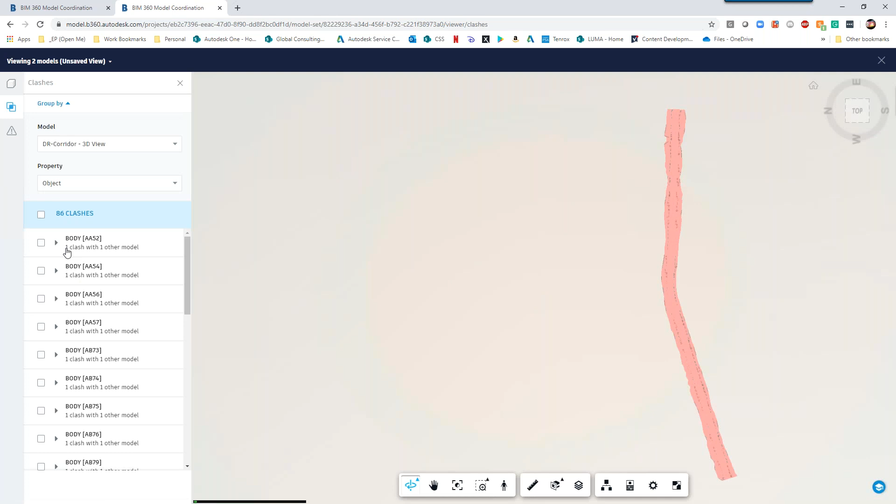There we go. So here we can see that the corridor is clashing with sanitary 86 times. Let's jump over there and start looking at what those clashes look like, and then realize that we're going to be able to start assigning these clashes to individuals on our design team to go deal with. And so what you're seeing right here is, as we would expect, the surface is clashing. Okay, that one's okay. We don't care about that one.

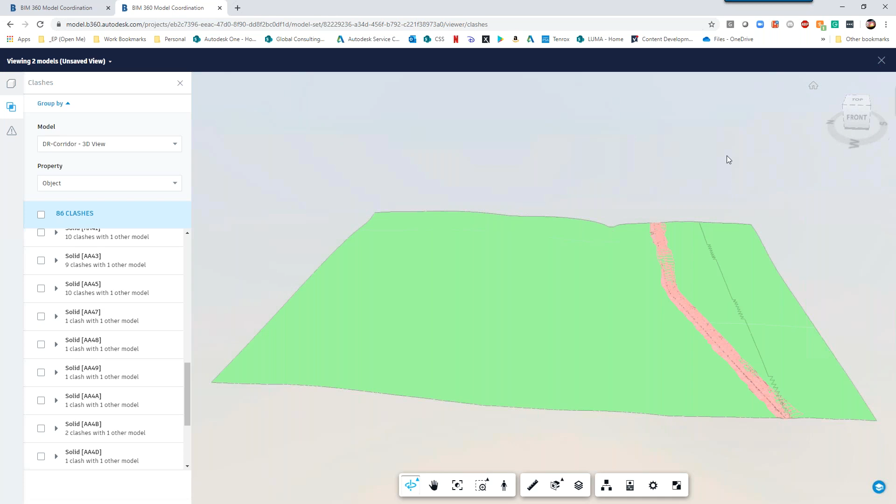And so we can go through our process here and say where we care about the surfaces clashing and where we don't care about them. We really don't care about the corridor clashing with sanitary because I know the sanitary is deep enough. So we can move right on from this one and move to our next set of clashes. And so it really becomes important for you to start managing the information that you're pushing out into the environment so you can get your accurate clashes and your accurate views.

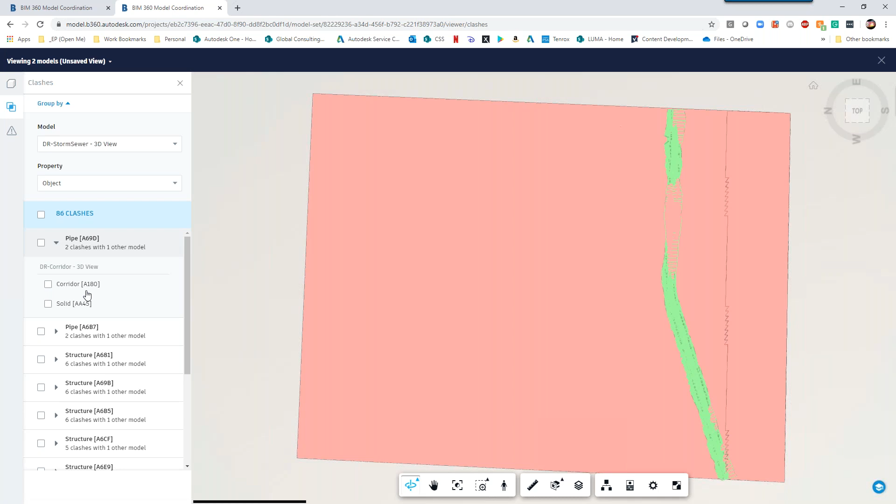Again, here we are with our, I think I picked Storm this time. And this is the one that should clash. I did pick Storm. And this pipe is clashing with a solid. And that's what we did want to see. So if I zoom in here, I'm going to see that this solid is clashing with this pipe. Now that's a problem. We don't want that to happen.

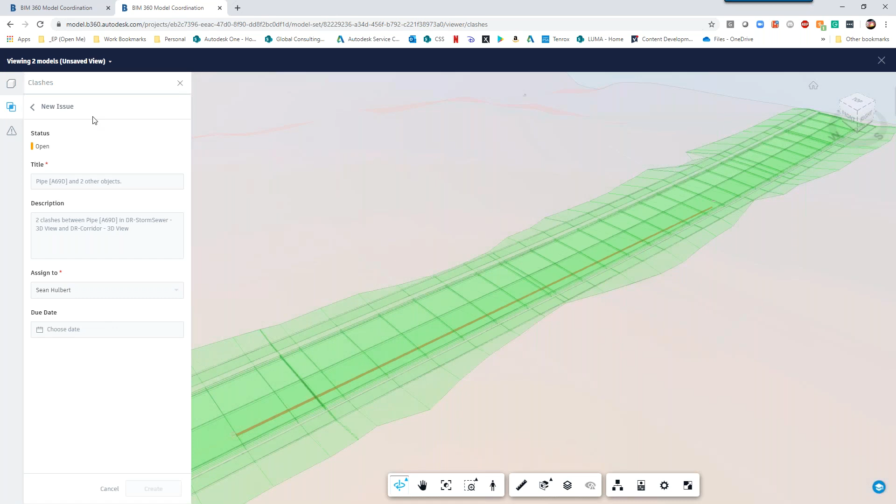So now we go into the process of assigning this issue out. We're going to go ahead and create an issue. We're going to assign it to Sean. We're going to say pipes are clashing. We're going to assign it, and why can I not create? What did I forget to do here? Got my title. Oh, because I didn't put my pin on this drawing. You got to put where the issue's at. My apologies, everyone. Excuse me. And there we go.

So now I've created the issue. We move over to the assigned tag. Sean is now responsible for the open issue where this pipe is clashing with two other objects. Here's our model, if I needed to jump back over into there to check it out.

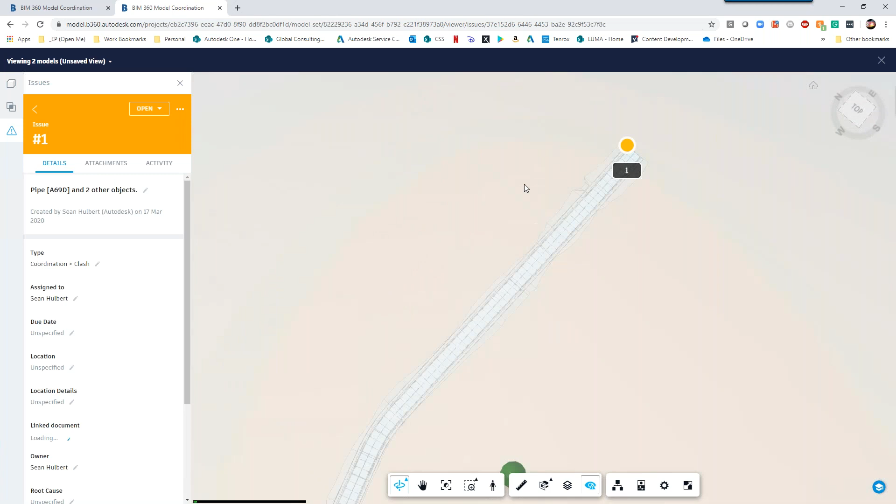So as we're working from home now, this is going to give us the ability to start leveraging those teams to get this work done that we still have a job to get done. So this is going to help us hopefully get those jobs done a little bit quicker with a lot more efficiencies.

So I'm going to open it up real quick. Who is leveraging Navisworks and Civil 3D right now, or who has leveraged BIM or model coordination with Civil 3D right now? Am I really jumping off the cliff here on my own?

Oh, of course, Todd. Yes. I didn't even ask that question. Todd's going to put on one of these presentations for us one day, Michelle. That's right. Give you a little break, right? We'll just go ahead and call him out here on the call, and that way he can't say no.

Anybody else leveraging this? Are we finding this information helpful? Is this something new that you might want to start playing with in your environment? I guess would be another question if you haven't used it yet.

And I will also say that, again, I like to say things I shouldn't say. Keep your eyes open for some enhanced functionality in a lot of our products this year for our global launch. As you know, March and April is that time when you might see new Autodesk products. Hint, hint. There's been a lot of exciting things going on behind the scenes here. So I'm really excited to see what happens with our 2021 release of our products, and I'd really like to hear some feedback from some of our users on what they think about the changes that have been made.

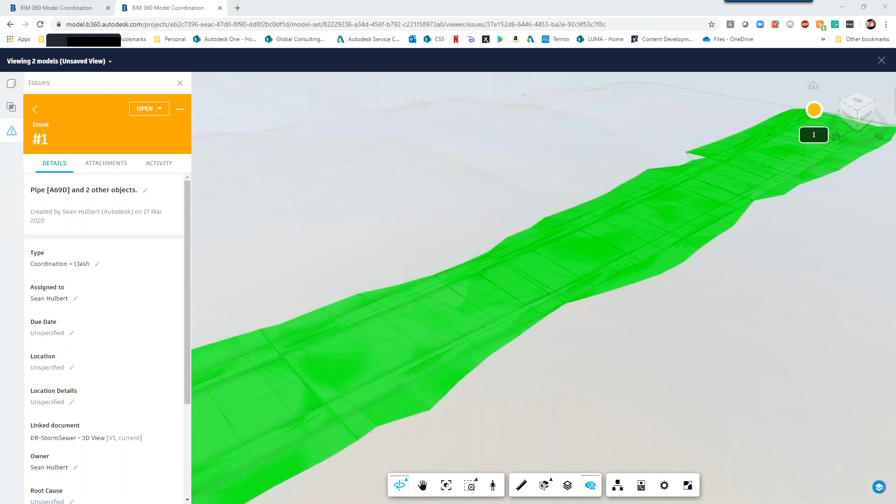So we do have 10 more minutes if you have any questions. Is there any other bridge somebody'd like to see me jump off of? And as I say that, I kind of missed an opportunity here. If I take 10 steps back, in my design here, I should have thrown this road up in the air or put it over a ravine or something of that nature, and think about how your Revit bridge is going to clash with your piping or your structures as far as your substructure and your assemblies and things like that. That's another area that we don't necessarily always work the details out until we're in the field. So you're going to have to hang that pipe on something if it's crossing that bridge. What does that look like, and are we taking that into consideration?

So Todd is asking the question, where's the best place for feedback? Would it be the infrastructure portal? I believe you wanted it in the futures portal, right? The Infrastructure Futures portal, yes. And so for all those that don't know, the Civil 3D Futures and the InfraWorks Futures portals have both been retired and combined into the Infrastructure Futures portal. So if you were a member of Civil or InfraWorks, you should have been moved over. If you have not, I don't have that email handy. I should have that before I even start talking. Feel free to reach out to me and I'll make sure that you get plugged into the Futures portal. And then Tim Yaris is the product owner for Civil 3D, and they do a presentation on most Thursdays at 8 a.m. Frequently, they'll get canceled if there's nothing exciting to show you, but 2 or 3 times minimum per month, you're going to see a presentation on what the Civil team's working on if you're part of that Futures portal.